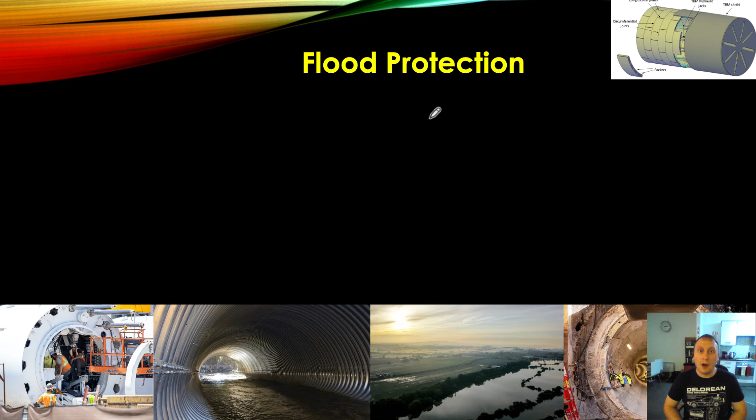I'm not sure if you're aware, there was a major incident in the UK yesterday where a train derailed and 3 people unfortunately lost their lives, and that was caused by severe rainfall. And today it's just been dry as a bone, and that's the issue. It's very extreme from day to day, season to season. Flooding is a growing problem worldwide in many countries, and heavy sustained rainfall is becoming more and more extreme.

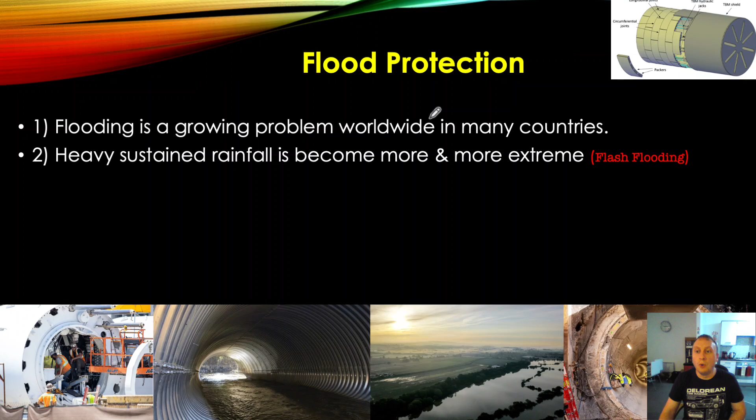Flash flooding. This is not an experimental concept, to divert rivers, or to take flow away from rivers and take that on another route away from where it is originally going. One thing I will say is it's just going to become a huge problem in the next 20 to 30 years. Really big problem. And this is an opportunity, once the Boring Company becomes established, to maybe get into something that plays on its core competencies of building tunnels quickly and cheaply and efficiently.

And they also don't need to worry about putting systems inside those tunnels. So it only really becomes viable when it can be done for around 8, maybe slightly more, $8.5 million per mile. This example here cost a lot more, but because the flooding was always very severe, it was money well spent.

It would definitely improve the lives of many people marooned in flood-prone areas, because if you are a very poor person and you live in this particular area and you have no option but to live there, you are just going to have to adapt to the flooding. And if that means you lose your livelihood, it's the sad state of affairs that is going to occur every time you have a flash flood.

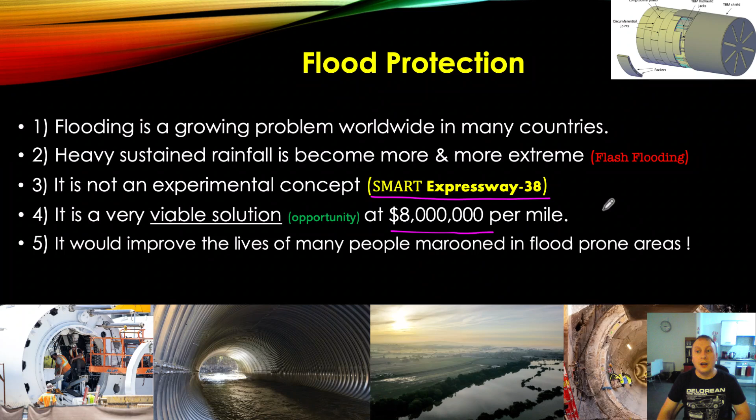Now, the Smart Expressway 38 is a project that was constructed in Kuala Lumpur. It's a very interesting project. I'll put a link in the comments below about a video that I watched about this project. I was made aware of this project maybe around 8 or 9 years ago. Very interesting. I think there's a lot of things to be learned from this project for the Boring Company if it intends to get into this field.

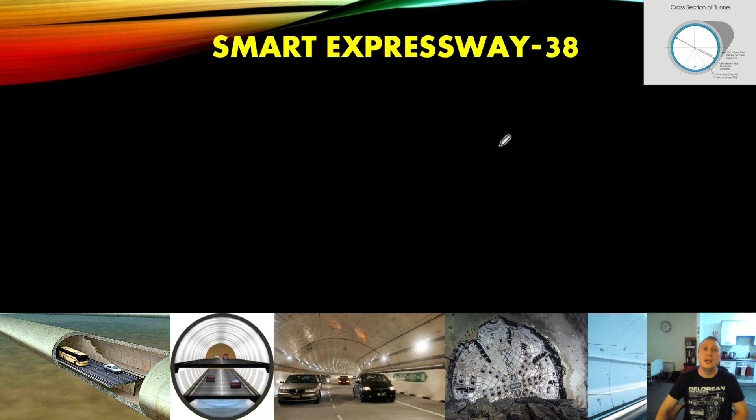So the project in Kuala Lumpur, Malaysia was completed in June 2007. It doubles as both a toll road and a flood prevention tunnel. That's the unique thing about this tunnel, is that during most of the year it is used as a toll road only, and it is bone dry inside. But then during those very heavy flash floods and during the rainy season, it is used as a flood prevention tunnel as well.

So it has a double deck system, so it actually has cars on 2 levels, and then underneath that it has space for water flow as well. So the actual double deck system that carries the cars is 2.5 miles long, so it's 2.5 miles plus 3.5 miles for water diversion, but 3.5 miles is just purely for the water diversion and not for cars.

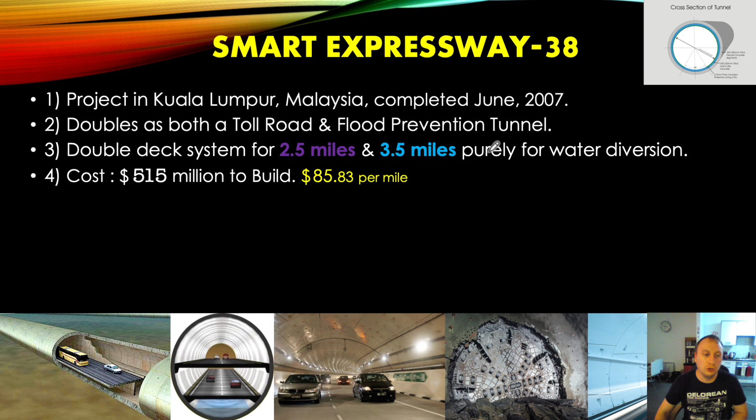It cost $515 million to build, so that works out as $85.83 million per mile, which is quite big, really quite big. And that's just a tunnel. There's no stations in that. That is a very, very big tunnel. I should know this, but I think it's about 34 foot in diameter, maybe slightly bigger. So it's a big old tunnel.

It has 3 modes of operation. So normal mode, the tunnel just acts as a toll road. It is bone dry, no one's in there. When there is a minor storm, it allows water to go into the bottom, the invert of the tunnel. Not a great deal of water, but enough to keep river levels fairly low. If you then have a major storm, it then uses the entire tunnel for water diversion.

Smart Tunnel has proven successful as Leboh Ampang and Jalan Melaka have witnessed 0 flooding incidents in over 12.5 years. So since this project's been built, it has prevented all floods. So that is a really good sign, very good sign.

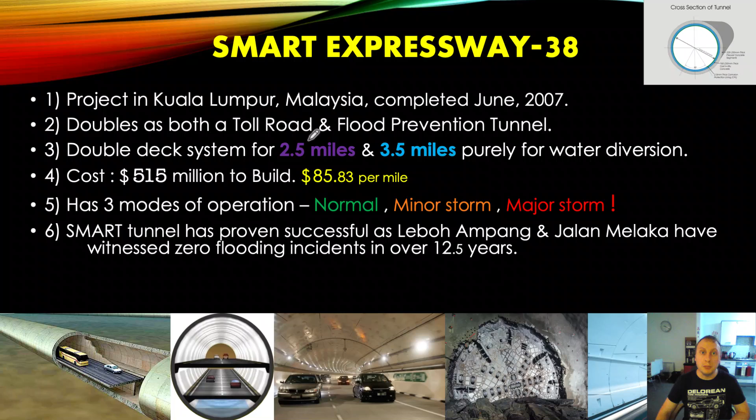So it has definitely earned this money back, because you think of the money that you lose when you can't open your business or your apartment gets flooded and all your possessions are essentially damaged or destroyed. So it is definitely worth its weight in gold. What a great little project that was. A great example of civil engineering making the lives of people better than it already was.

So here's our cross section. As you can see, stormwater is down here, and most of the time that is the only area that is used for water. So 80% of the time this is just purely a toll road, and then the other 20% of the time they use it for flood diversion, and it's very, very rarely the entire thing.

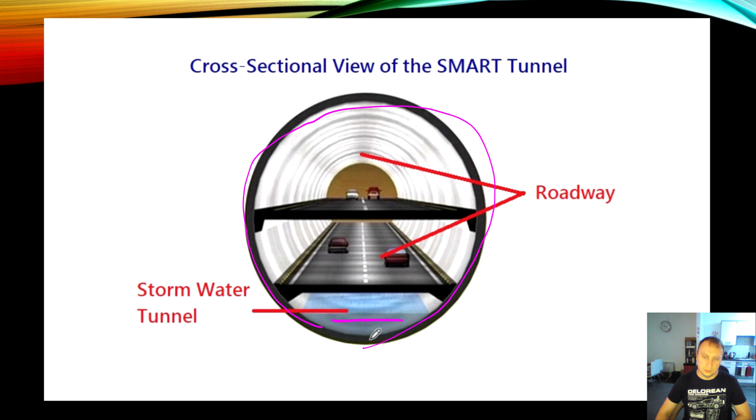Okay, so case study. River Severn is a major problem in England. The government really is not doing very much about it, and the solutions that they've come up with, they have built some flood defences, but what that has done is just taken water, pushed it downstream, and then caused issues in the wrong places. And because they don't want to continue building that flood defence, the people that can least deal with the flooding are the ones that are getting flooded on a daily basis.

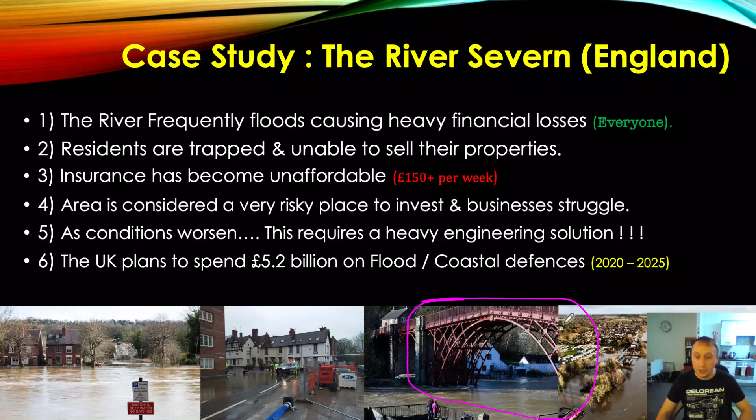So, this is the plan. This is my idea for how you could potentially reduce the probability of flooding to very, very low levels. There may be still a small possibility of flooding, but with further improvements you can reduce it to almost zero.

So there is a reasonably large town on the banks of the River Severn. It's got a reasonably decent football team, but other than that it's not really that famous for anything. But Shrewsbury has become a little bit famous because it gets flooded, and there's lots of people living here. That means there is lots of potential money for flood defences. So a good place for the Boring Company to start would be in a medium-sized town like Shrewsbury.

There are lots of other places along the River Severn: Ironbridge, Bewdley. There's a couple of other places, Worcester, lots of places in Gloucester as well, Gloucestershire. So in terms of the best opportunity, I think this is probably the best one to start off with. So it wouldn't be a massive tunnel, it'd be 4,295 metres. That is the main tunnel.

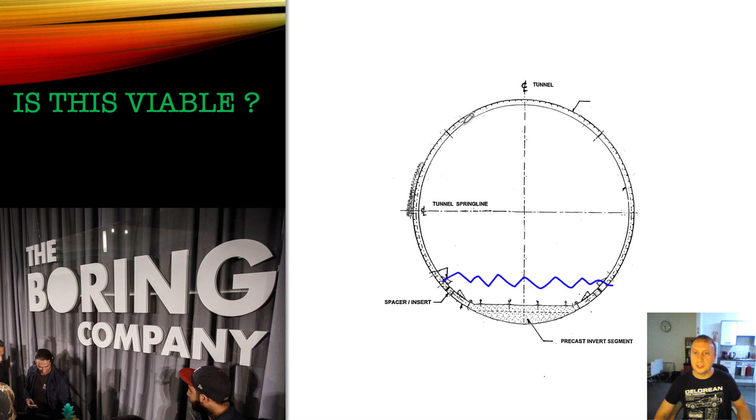Let's change my pen. Most of the time, the water level in the tunnel would be around here. But during flood season, it potentially could be all the way up here. So, you know, that's at least 15 foot higher. So its normal level would be this. Its upper level would be this.

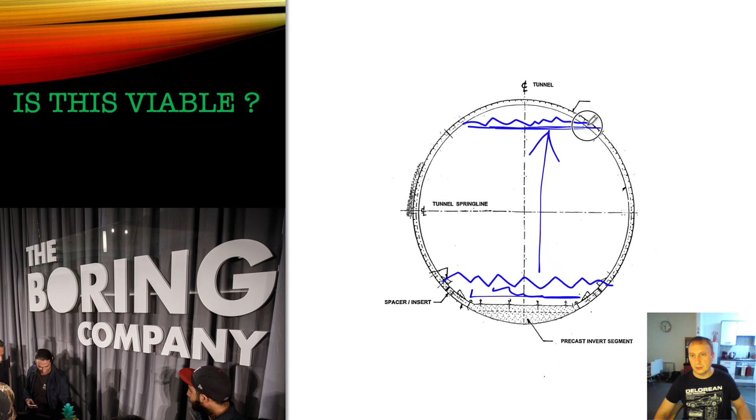Very viable. So, what are the specs? How are we going to make this work? How are we going to make this affordable? How are we going to sell this to the UK government? Number one, we can't use the current 14-foot diameter tunnel. It's just not fit for purpose.

Now, these kind of projects for the Boring Company potentially would be happening in the next 8 to 10 years. So it gives them an opportunity to perfect the 14-foot diameter tunnel and then come up with a system for an 18-foot diameter tunnel. It's just over 18 foot, 1.5 inches. So they have to develop a new system for a new size tunnel. The cost's going to go up because it's a bigger tunnel, there's more spoil, there's more concrete segments, etc. But obviously if we can recycle that spoil into bricks, that's going to bring the costs down dramatically.

So I'm confident that the Boring Company could do an 18-foot diameter tunnel, or external diameter tunnel, for under $8 million in the future, in 8 to 10 years time. So 5.5 metres diameter, main tunnel. The tunnel would be run at a 1 in 300 gradient or better. It depends obviously on the topography of the land. Ideally you'd want it to be 1 in 250, 1 in 200, so a nice gradient so the water is flowing through the tunnels at a rapid rate.

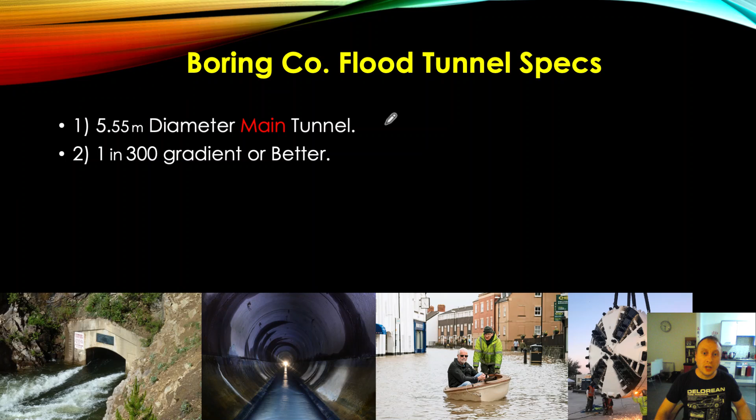Obviously the faster the water runs through that tunnel, the more flooding that is going to happen at the other end of that tunnel. But if you've built a good sized floodplain in that area and there's not many people living in that area, ideally 0 people, then it's not going to be a massive issue. And in fact people will be happy with that because they'd rather that area floods than their homes.

So there'll be various secondary tunnels with sluice gates for rapid flood diversion. So most of the tunnels will be fully open all the time, but there would be then secondary tunnels that feed off the tributaries that run into the River Severn, and they would have sluice gates, and then you would obviously try and divert as much water into the tunnel as you possibly can via those sluice gates during a flood scenario.

So almost as important as the main tunnels and the secondary tunnels are sustainable floodplains. So you need to move the flooding to different areas. You need to isolate those areas and define them as floodplains, prevent people building there, and allow the rivers to naturally overflow into those areas rather than flooding the centre of Shrewsbury.

And that might mean that certain people who own that land, like the farmers, the government might very well have to pay them off when flooding occurs, or maybe all year round, who knows. But that is a better solution for more people if there is less flooding.

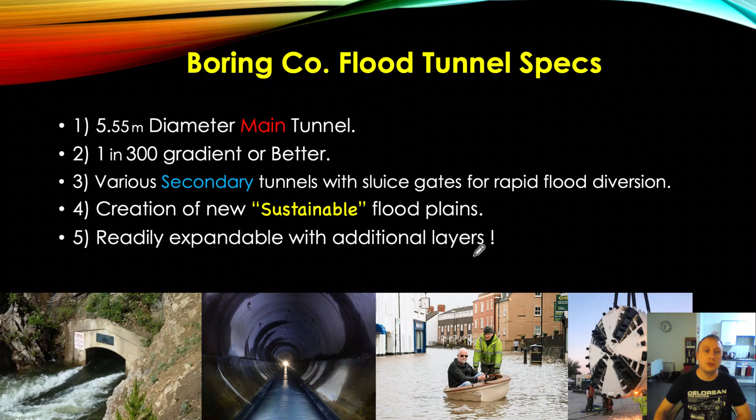You could have passages leading into that tunnel from the main tunnel, so you're constantly forcing water through the system. Because that tunnel is deeper, that means you can get a better gradient, maybe a 1 in 200 gradient there, and then that means you're going to force more water around Shrewsbury and into your sustainable floodplains. Okay, so that essentially is the idea.

Obviously, we want the Boring Company to focus on mass transit. That is the most interesting area, but there are millions of people every year who are affected by flooding. This is potentially an opportunity. It's a very good opportunity because essentially you'd be paid via the government, certainly in the UK. I'm not sure about the USA and other parts of Europe, but certainly in the UK. The UK government would give you a nice piece of cash that you could then spend on these kinds of things.

So in terms of the Shrewsbury Tunnel, we're talking maybe just under £100 million of investment, but it's well worth it because you're not having to shell out loads of money to insurance companies, and you're not having to worry for 3 months of the year that you're going to get flooded. So all in all, I think it's a very good idea. I hope you all agree.